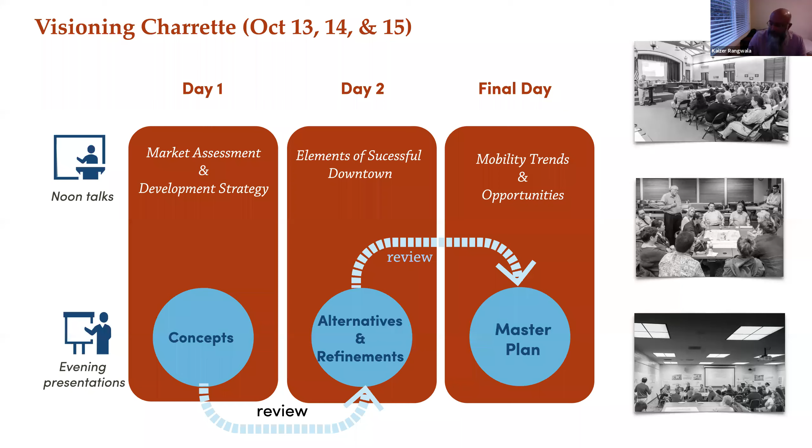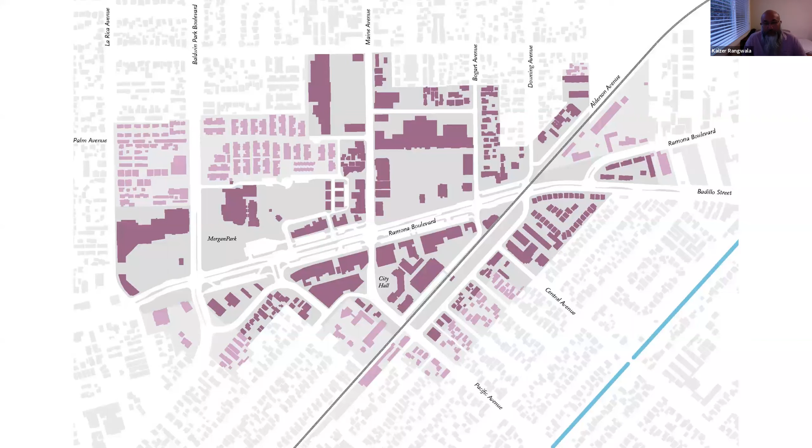So what you see in the darker purple are the buildings and lots that are within the existing specific plan. And what you see in the lighter purple are expanded areas of the specific plan. This is the question that we received yesterday: why do we expand certain areas? I want to hone in on this graphic and show precisely why we're expanding. We want to take opportunities that present themselves at the station and also protect the existing neighborhood. Involving some of the frontage parcels along the station helps us do that. In addition, there are additional opportunities that have presented themselves as catalytic sites since the last specific plan. They've been added to expand the boundaries. So the new boundaries are everything that is dark purple and the light purple areas.

This is a 3D rendering that illustrates a couple of important concepts, and I want to quickly highlight 2 or 3. The downtown Baldwin Park is over 142 years old, the entire city of Baldwin Park. And the downtown really kicked off when you had the red line coming in along Ramona, and you had a grid system that provided access.

Over the years, that existing street grid system has been eroded by consolidation of certain blocks. And you can see that as you look at the grid system around downtown Baldwin Park, when it comes into the downtown area, you see larger chunks of land. In most downtowns, you see the opposite. When you come to the downtown, you see a much more granular, much finer network of streets.

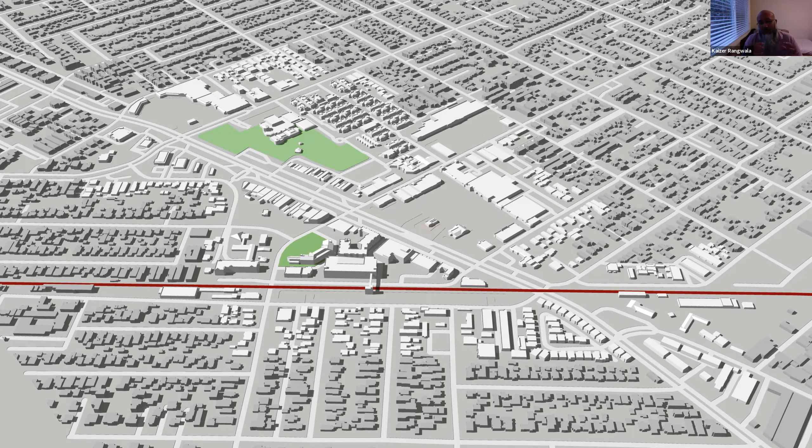The challenges as we look at making this area more friendly, more walkable, because one of the things we heard from the interviews we conducted is it's difficult to get from one destination to another. And by the way, you have some really good assets and really good destinations in the downtown. The question is, how do you link, how do you make the journey between these destinations also as wonderful as

the destinations itself? We started exploring how do you weave a network of streets, weave together the streets that are there and create a finer granular street network. But then also, besides the linkages and reweaving the streets, the opportunity that the streets present to reimagine them, not just as places to move traffic, but as multimodal, perhaps even linear open spaces that can stitch together your existing open spaces and a variety of new open spaces. So a variety of street types that begin to stitch together your variety of existing and proposed open spaces.

Now, another thing this super block does is you see the buildings and you see large areas of gray. Those gray areas are essentially parking lots. And in the downtown area, you have 776 parking spaces, plus about 511 in the parking garage at the station. Average occupancy of parking in the downtown is about 56%, and that is roughly to say that half of the parking spaces are not occupied. And there is a surplus of 325 spaces. That's a great opportunity to attract investment and to leverage enhancing the public realm, both in terms of streets and

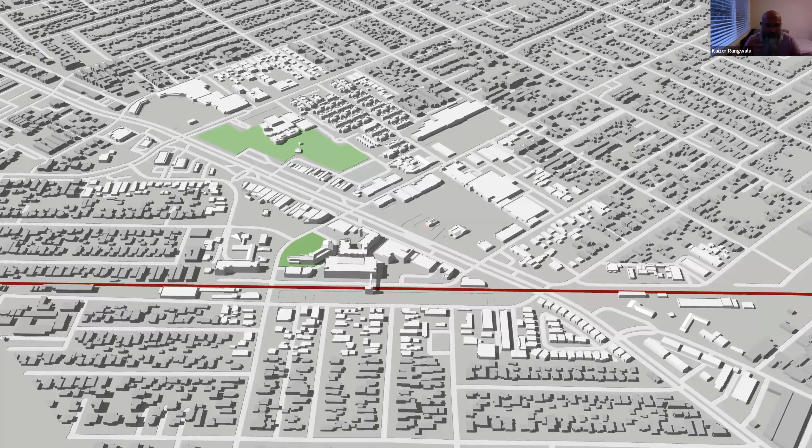open spaces. So with that introduction, I want to introduce Tim Erney from Kittelson, who's going to walk you through some of the mobility concepts and parking strategy concepts that we have been discussing, and then he will introduce the next speaker following his talk.

Great, thank you, Kaizer. Just wanted to do a quick sound check to make sure everything sounds okay. We good? Yep. We are good, excellent.

So as Kaizer mentioned, Baldwin Park in particular has some really unique transportation options and some great opportunities that we can take advantage of. As an example, it's relatively flat, and outside the downtown area, it has a pretty good grid system. And most importantly, there's a lot of transit options. And we really need to take advantage of this, especially with respect to the transit infrastructure and the commitments that have been made by multiple agencies, including the city.

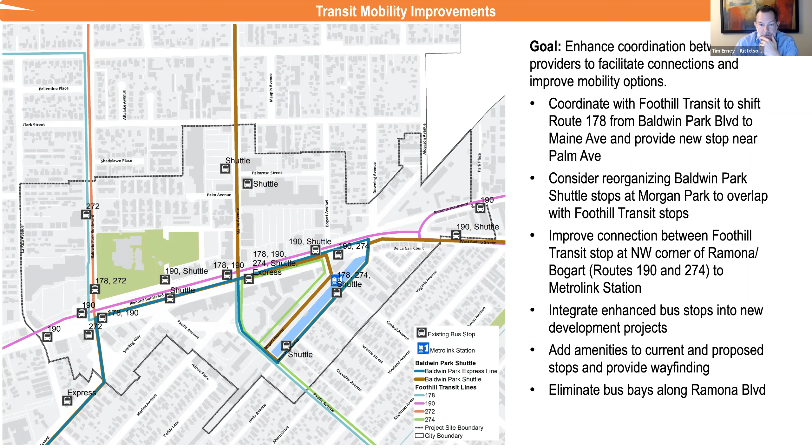So another thing and another opportunity to improve access is mobility hubs. And this is a relatively new term for kind of an older school way of doing things. But really, mobility hubs look to improve the connection between the modes of travel and to really facilitate the connection between user groups. So when we talk about mobility hubs, what we're looking at is a combination of various elements, such as wayfinding, bike share or scooter stations, kiosks and information for transit lines, pickup and drop off areas, spaces for electric vehicle charging, Wi-Fi hotspots, even locations to put mobile retail or food trucks.

So really, these are hubs that people can use when they're traveling between modes, and really it kind of actually becomes a little active community area. So there's 3 locations right now that would be great to put in mobility hubs. And this is at the Metrolink station, near City Hall, and for Morgan Park and the community center.

In addition, as we continue to look at expansion of the land use program throughout the area, there's other opportunities that could arise too, such as at the Valu Plus Marketplace and the Maine Avenue Marketplace. So as these areas develop, there could be opportunities to put mobility hubs there as well to kind of continue to build that network across the city.

So one thing though that we often forget is that streets aren't just for cars, right? Streets are for people. And we need to make sure that we're planning for and building roadways that are safe and convenient for everybody. And that's for young and old, for people riding a bike or on foot, for people who are strong bike commuters and people who are out there riding for the first time, people who are in cars, people who are doing deliveries, and people who are getting on a bus.

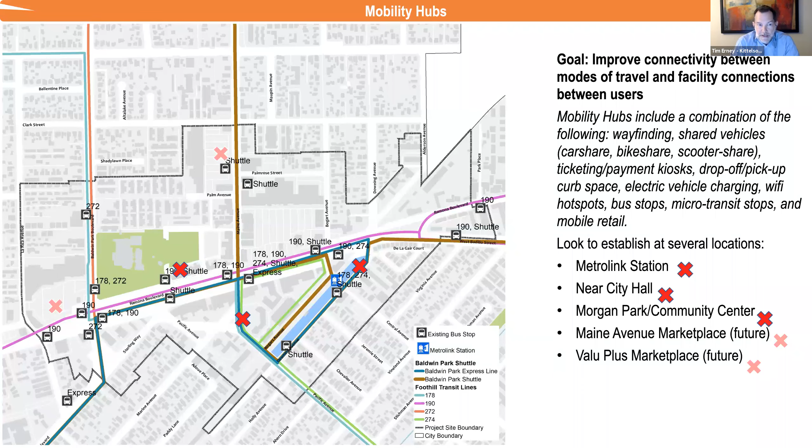So when we talk about parking and parking management, what we're saying is that we want to account for vehicles, but we want to make sure that we're doing it smartly. So we want to account for the vehicles, we want to account for their demand, and we want to look at ways to minimize excessive parking. As Kaizer mentioned earlier, there's a lot of parking that's currently available throughout the downtown area, and that parking takes up a lot of room. And this is especially important because for a lot of these spaces, cars are just parked there all day long. They're not moving. So that space can't be used for anything else throughout the day.

So looking throughout the downtown, we provided this information earlier. There are several lots that are historically less than 50% occupied on a normal day. And there's a lot of other things we can do with that space. We can put in new buildings, we can put in parks, we can put in transit hubs like we talked about, and a lot of other things.

But honestly, parking is always a big topic in these conversations. Half the people think we're not providing enough, and half the people think we're providing too much parking. So it's really difficult to strike that middle ground. But one way of doing that is to really look at parking management strategies, especially associated with the transit-oriented development that we're talking about. So some of the things that we're looking at is

developing a goal to increase the efficiency of the parking facilities, to improve the utilization, and to minimize the total amount of parking area. And in order to do that, we're going to look at things such as providing convenient on-street parking adjacent to new commercial uses, so new commercial buildings have parking directly in front. Providing security and access control if we're looking at maybe having people be allowed to park overnight. Let's say their residential building doesn't have enough parking and they want to be able to park on street or in a lot, make sure that's safe and secure.

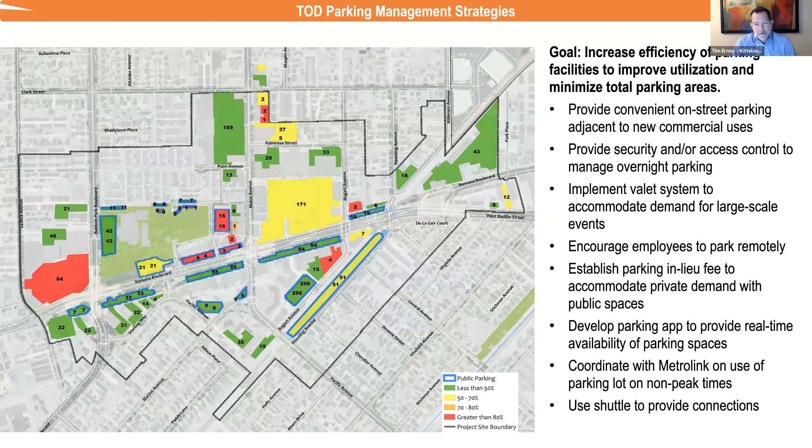And when we talk about private parking, primarily this is parking that's being developed as part of new buildings that are coming in. And we want to make sure that the new projects that are coming in are right sizing their parking, because honestly, parking is very expensive to build, especially if you're building it underground. And we don't want to have developers burdened with a high amount of parking that may not be used and can really add to the cost of their product.

So there could be opportunities to allow developments to meet their parking requirements at off-site locations, to allow for sharing of spaces. So typically parking codes say that if you're a residential, you have to provide X number of spaces for your units and then Y number of spaces for any commercial space. But sometimes those can be combined because the parking demand for residential tends to be overnight versus during the day for commercial. So maybe we can change the codes a little bit.

We can look at parking easements or use agreements between the city and private developers, once again, to maximize that parking efficiency, or establishing in lieu fees so that the developers could kind of purchase excess spaces from the city and use that to accommodate their requirements.

We also want to look at unbundling parking supply. And that means if you're moving into a new building, your parking space isn't guaranteed, but you have to purchase it just like you would purchase your unit. And therefore, if people don't want to have a car, they don't have to pay extra for a parking space they're not going to use.

We also want to make sure that people are accounting for pickup and drop off and deliveries either on the curb or inside the parking garage. So that will help improve the ability for car share or Ubers and Lyfts to access the properties. And we also want to have electric vehicle parking included as part of these developments. So these are all kind of private parking strategies we're going to be exploring as part of this program to see how, once again, we can maximize the efficiency of parking and minimize wasteful parking.

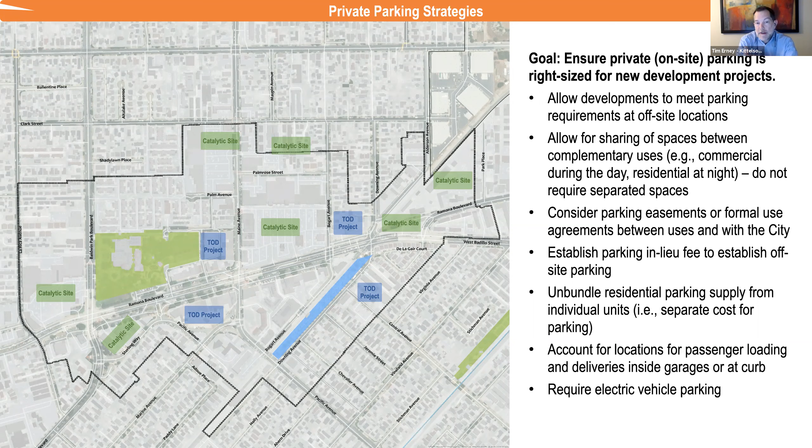So with that, I will turn it over to Vinayak to talk a little bit more about the public realm and the street network.

Can you all hear me? Mm-hmm. And can you see my mouse moving on the screen? We can't see the mouse. Can't see that. Okay, don't worry about it. Just wanted to know.

Okay, so just to pick up from Tim's points, one of the most important assets that you have, just to repeat a little bit on what I was saying yesterday, are your streets. And as Tim said very explicitly, the streets are not for cars, they're really for people, they are extended parks. And I keep saying this again and again, it's the most beautiful thing I've heard about streets, it changes your perception of what streets can be.

So what this diagram basically shows you is before we get into all the big and small moves that we shared with you yesterday and we're going to share with you today, the bigger strategy is to figure out how to create an integrated network of streets. And one of the major observations we made in studying your downtown is there is a tendency to combine blocks and make sort of mega blocks.

This is a tendency we've seen in many cities. Over time, walkable sized blocks get coalesced into much larger swaths that are 1,000 feet long. And this is a recipe for two debacles. One is traffic congestion, because if you have an accident on one side of a mega block, traffic circulation becomes very difficult around. And as a pedestrian, you don't get easy access from one side to the other.

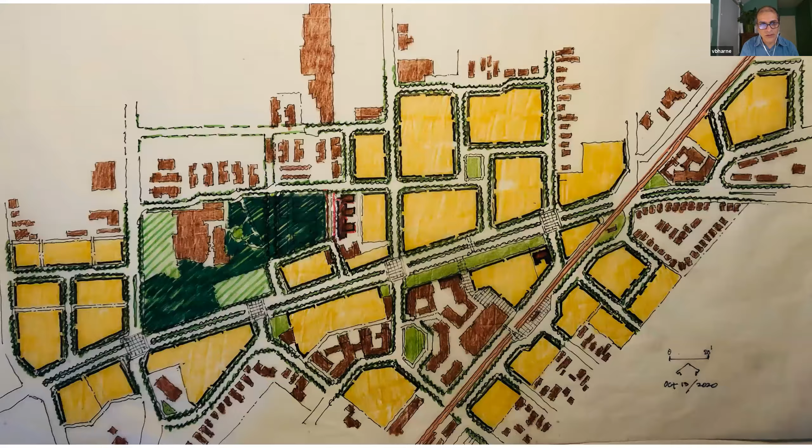That's okay. That's all right, guys. Just, it's okay. Just keep going. You have to go to, there you go.

So if you look at the block west of Pacific Avenue, in either corner of the block facing Ramona, there are two open spaces. These open spaces are actually part of the city-owned parking lot right now. What we are simply doing is note that the two buildings in the corners are lighter color, because we feel they are buildings of some significant merit. There's a building to the west that is made of brick. It's a very beautiful brick building, which you will not be able to build today very easily. It's a quality building. And there's another one to the right-hand side, to the east.

And we feel keeping those buildings also makes a kind of a unique piece, because you don't have to demolish everything you have in your downtown. You don't have to dissolve everything over time. Some of these buildings could become important markers that talk about history, talk about how this place evolved, etc. So we're acknowledging this by making very small open spaces between them, which could also act as moments of repose, programmed either privately or publicly, and we can study them as this plan evolves.

So in terms of pure public improvement strategies, you have the train station plaza, the plaza in front of City Hall, the paseo next to the parking garage, the long linear plaza south of Ramona, the intersections along Ramona, the enhancement of Ramona itself, the entire street network that you can see in green here, and the tiny little dots of open spaces scattered here and there.

The last open space that is worthy of mention, which you can see as a small rectangle in the 4-block development between Bogart and Maine, north of Ramona, is a little neighborhood park that could either be a private park or a public park. The point we are trying to make there is, with so much potential for development in that piece of land, instead of all space being private, we feel it necessary to have a small public space that can be used as part of a little neighborhood play area.

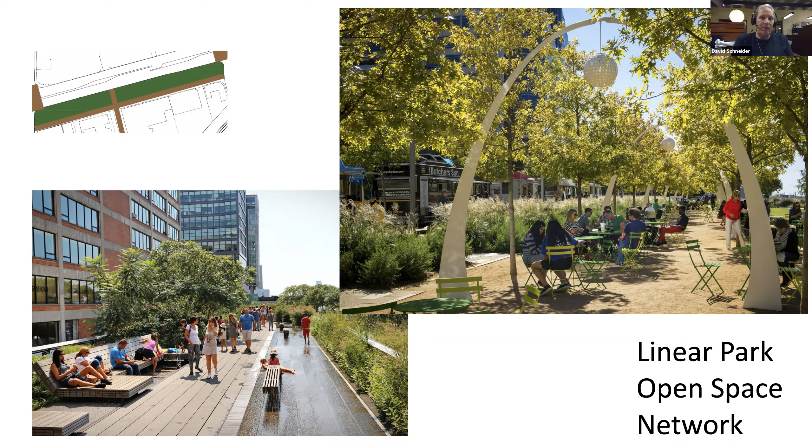And as you can see in the background, there are lots of opportunities for pop-up mom and pop trucks and lunch trucks and various other elements to come in and fill the areas, especially before development starts to happen. Some of the areas may already have some restaurants, some areas may not, like I'm thinking of in front of the Verizon building. You might want to be able to take advantage of some of those spaces along there. And then the other photograph starts to look at a more urban area where it's a little bit more linear, a little bit different in appearance. Can you go to the next slide?

Other opportunities for this area is we could have nighttime lighting that could really attract people from Ramona. Again, we're trying to get people off of Ramona. If that's a major collector street for people passing through, we'd like to be able to get them to see the area and see the happenings and what's going on. Again, the linear park could have built environments such as trellises, or it could use temporary features such as umbrellas and others. And if we go to the next slide.

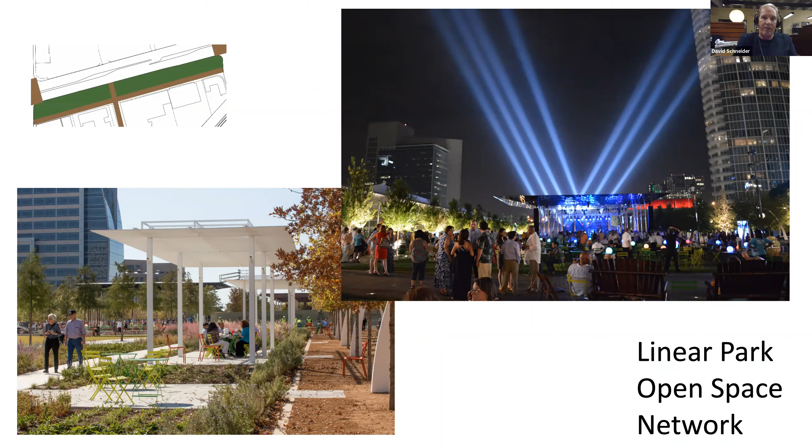And maybe at the corners of Maine and Ramona, we might introduce simple little waterworks elements that basically announce the gateway. These also become elements along the sequence of the walkways that get people to move through the area. So these might be strategically located along the paths from the train station to this area, or even as we move farther north. Next slide.

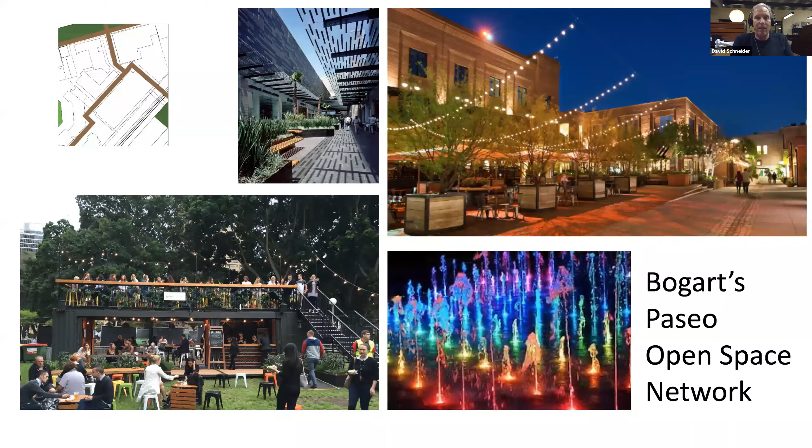And as we move through the Paseo, what does that start to look like? We might have interesting lighting, as well as using shade trellises to create shadow patterns, and also be able to have pop-up buildings, some things that are just simple use of containers to build up within the parking lots in a short period of time. But this is basically to try to get those people that are on the commuter trains to see a festive space, be able to start to come across and move through the Paseo and find their way to Ramona and through the other wonderful neighborhood areas. Next slide.

And how else can we start to do this? We have some big canvases, such as the ARC building and also the parking garage. We can use murals or light shows that can be done on maybe the ARC building or even the parking garage itself to, again, captivate people that are coming through on the commuter train systems and people coming up Pacific and other streets to be able to start to see that.

And also on the Paseo, we would like to have open spaces for people to be able to have outdoor events going on that could be readily seen from either Ramona or from the train station to, again, get people invited in through the neighborhoods. Next slide.

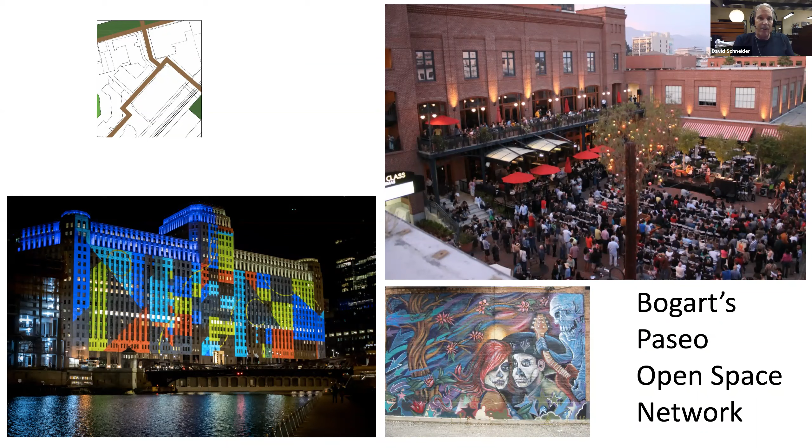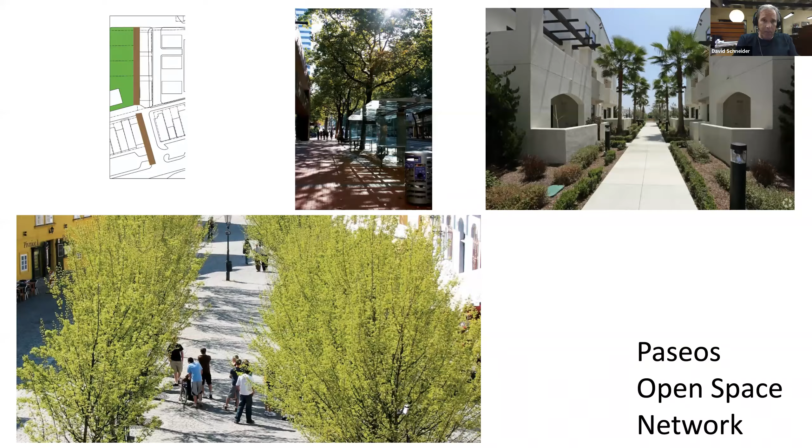So then we also have other paseos that we have to look at. These are different. These are paseos that might happen along the north side of Ramona over by Morgan Park. And how do we start to introduce that park-like feeling, again, bringing people down to Ramona from this space, or if you're on the other side of Ramona on the southern side, entice them to walk up and go up into Morgan Park. So these are various different options that we can start to look at, but shade and coverage is important to us.

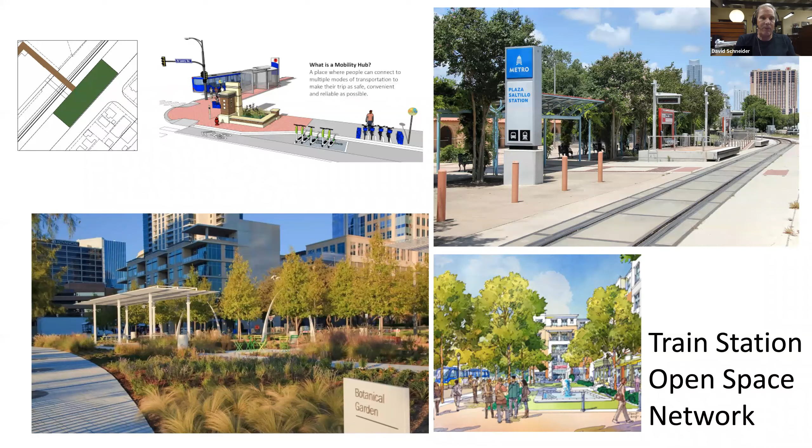And then we move to our small parks. We have our neighborhood parks to the north, and then we have our civic center park on the south side. And what would those elements start to be? On the small parks to the north, we might have play areas and naturalized landscapes for people to be able to use and go through.

And in front of the Civic Center Park, obviously, we'd want to have things that would allow people to rest along their walks, but also get them to come through. There might be a speaker's corner or something of that nature in front of the City Hall that might be pertinent to those functions. Next slide.

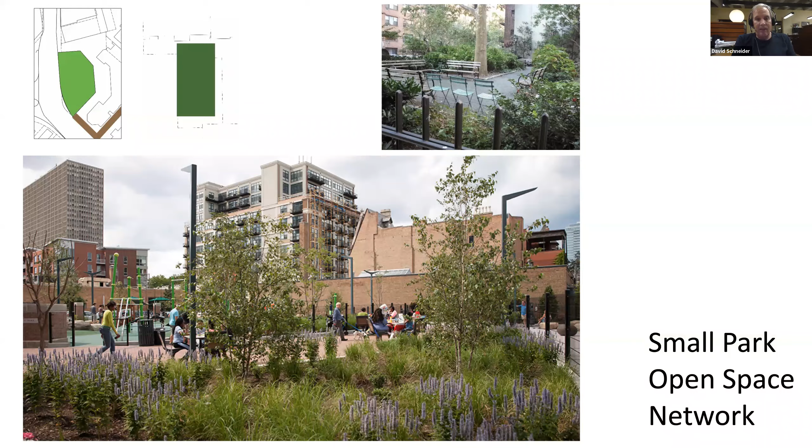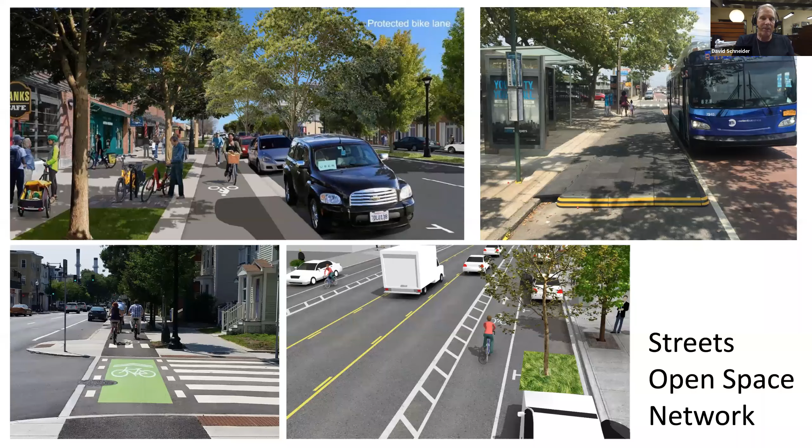And you also have the nice parked cars that give you a protection from the street, from the faster moving vehicles. And also we've introduced trees between the parking places that actually start to narrow the street, but also offer shade to all those who are using the bicycle and pedestrian paths. Next slide.

Or we could have quiet seating areas that might happen closer to where the new Starbucks is going, and those type of elements. So we have a variety of spaces, and they're very much opportunities to be used. Next slide.

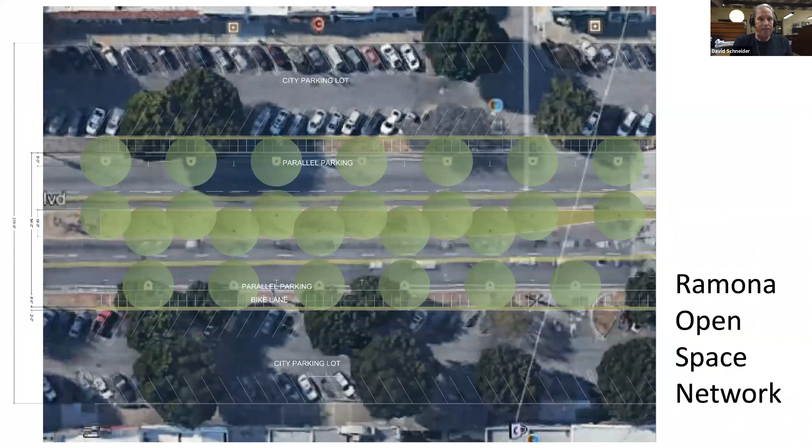So we started to look at Ramona and what would Ramona start to be based on a street tree pattern. And basically this shows that we could actually put in our bicycle path along the particular edge of Ramona. As Vinayak has mentioned, we're not changing any of the curb lines along that edge.

So what we have done is added 8 foot of parking along the outer edges of Ramona, and just within that curb line to the curb line roughly of the existing parking lots would become an elevated bicycle path, 6 inches higher than the street, along that particular edge. And that's how the bicycles would start to move along this side. And if we can go to the next slide.

This is kind of a section of what that condition might be. So we would have the 2 travel lanes and all the way across the 39 feet or 34 feet that's the existing width from the median to the edge. And then we would add another 8 foot for a bike trail along that edge. And then the parking lots would exist. And then we go to the next slide.

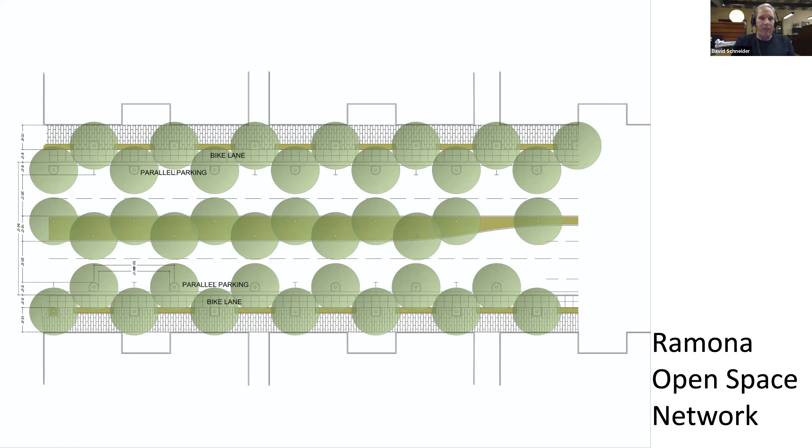this is a section of what that would start to look like. That 12 feet of space plus the 3'6" could become part of an easement from those property owners to create the pedestrian space and the space along the edges for retail or mixed use events. And even on the north side of the street, if you chose to do so, arcades could be employed and allow the second floors to be able to come out and come over that space. So there are opportunities for that to happen.

I don't think you'd want to do that on the south side because then it would be on the north side of the building in too much shade. But I think along the northern edge where you get the southern sun in the winter times, that would work out just fine for an arcade system if you chose to do that. Allow the developers to move across the easement in the second and third stories above. Next slide.

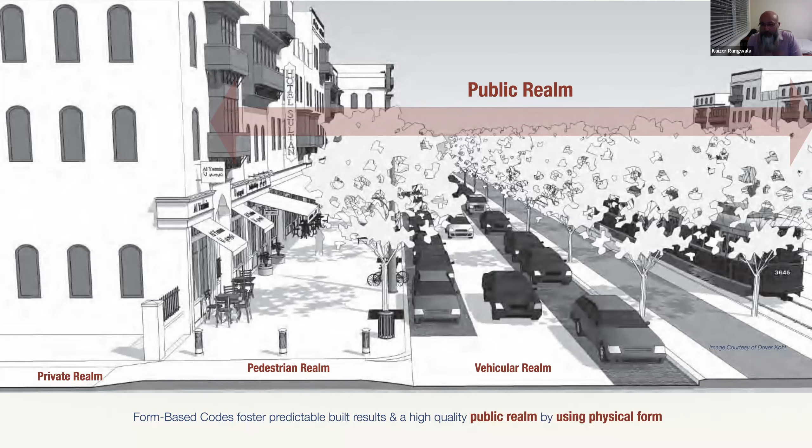It's less important what's inside the building, whether it's residential, office, commercial. The frontages will vary. But the land uses are less important. The regulating mechanism here is the public realm, not so much land uses.

They could be courtyard buildings, they could be mixed-use buildings, work-live units. But if you are on a different street, say a boulevard that is mixed boulevard, then those building types might be completely different. And then if you're on a residential street, I mean, remember the Mission Meridian project that Vinayak talked about. This is a great example.

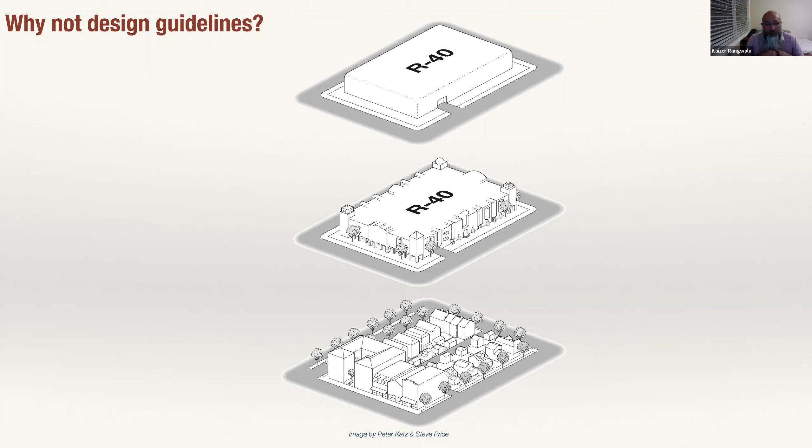So you break the box. You break the box with building types, and those building types are based on the context of the street, the context of the open space, the context of what exists within the area. So that's what we are interested in doing with this code.

We're also interested in looking at open spaces and a continuum of open spaces, both that start in the public realm, but go into the private realm as well. So we talked about continuous greenway or a linear park. A community park already exists in the downtown area. We're talking about creating new plazas, new squares, neighborhood parks, opportunities for community gardens and pocket parks, and then extending beyond the neighborhood and the block, and then continuing the open spaces.

Particularly relevant in this pandemic and the post-pandemic world is how do you provide open spaces on the lot and within the building, whether it's in a patio or a roof garden, or providing a courtyard, terrace, or a yard. These are private open spaces, but providing that continuum is important, and we're going to code that.

Streets are incredibly important. We've started discussing them. We're going to discuss street sections tomorrow in further detail, but we're talking not just about volume of traffic and speed, but we're also talking the ability of street to create places, to be multimodal, to be context sensitive, and to support adjacent land uses, and more importantly, based on a community vision.

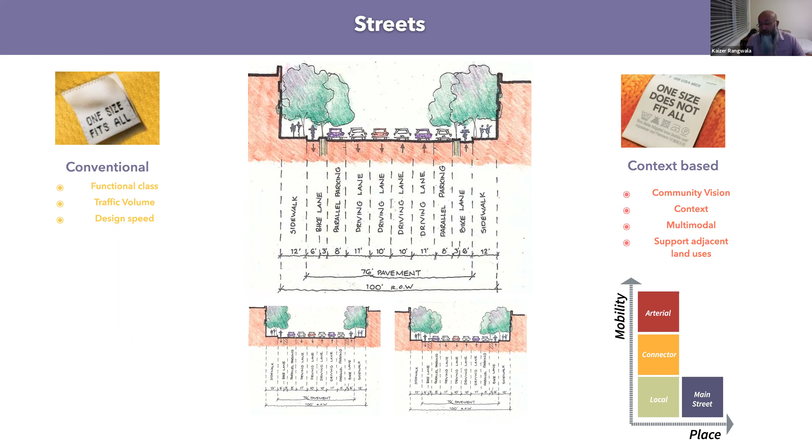And different streets have different purposes. They could be either placemaking, or they could be geared towards mobility. There's certain streets that the primary function may be to move traffic and less important is the place, but there are other streets like the ones that you have in the downtown area where place is incredibly important and should not be forgotten. So the standards will look at that.

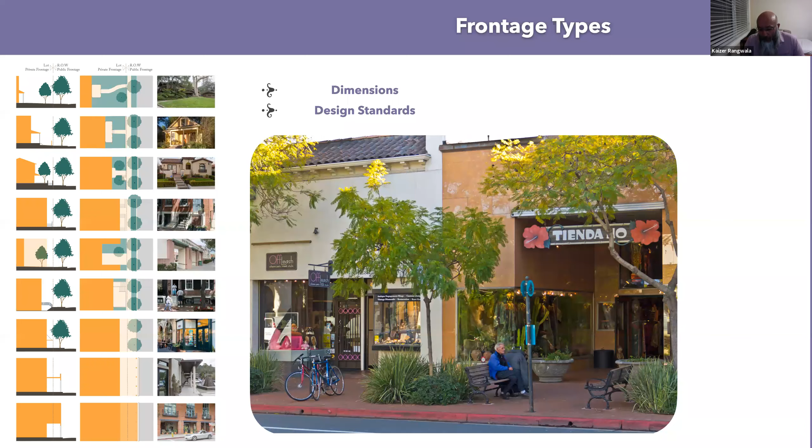And then frontages. Frontages are how the building comes and meets the street so that you avoid having dead facades or frontages that are inappropriate for the land uses that are provided within the building.

So again, we will come back and we'll have a much more robust discussion on the code. We'll have a regulating plan. We'll talk about the zones and the different urban standards. But that's the concept I wanted to present today, and we will at this point take a pause and begin answering any questions that you may have.

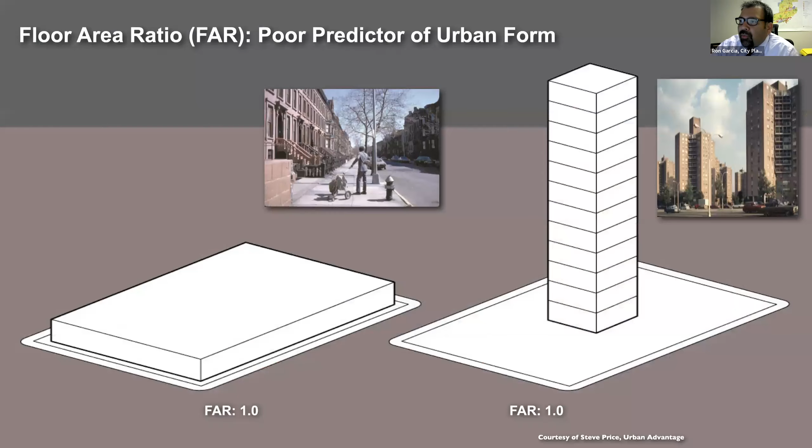Thank you, Kaizer. Looks like we have one comment that came in with respect to Ramona. Just for clarification, is the plan recommending that Ramona continue to be 2 lanes on each side?

Yeah, I can take a stab at answering that one first. So our recommendation at this point is to maintain 2 lanes in each direction. Partially, this is due to consistency on Ramona to both the east and the west of the area. And 2, we feel that with the additional development that could occur in the area, we would probably need to maintain that level of mobility for vehicles.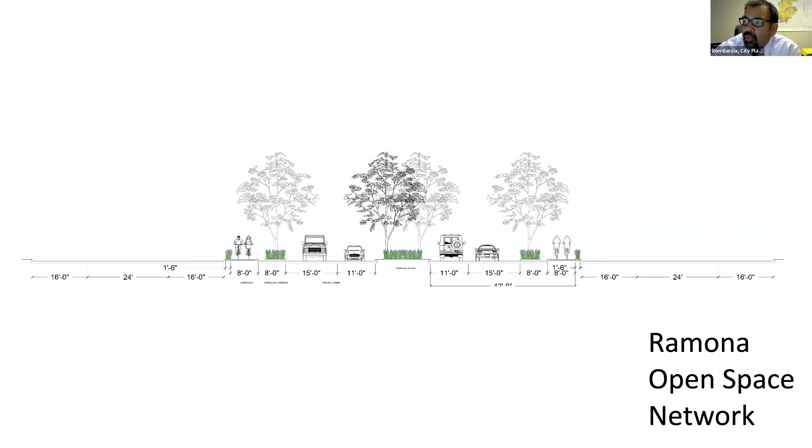Thank you, Tim. We got another question coming in. It says, is there an optimal street width to integrate landscape features in the medians or landscape buffer between bike lanes and vehicles? For example, Main Avenue going to Pacific Avenue is now a one-way lane street. Are these streets eligible to have both a pedestrian and vehicular realm? This area specifically is where the city attracts more foot traffic through community events.

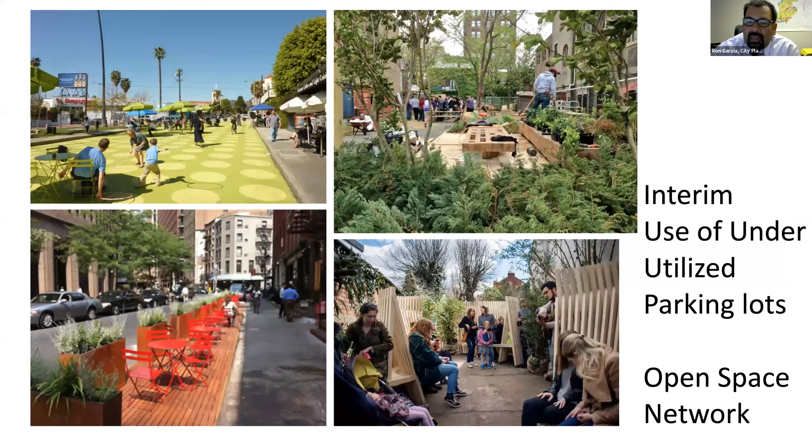Tim, you want to take a crack at that? Sure, I can start, but looking for other input as well. So yeah, there's a couple different factors at play when we're looking at the width of streets. So one is, for as much as we can, we don't want to expand past the current curb to curb width, because then it becomes very expensive to have to redo sidewalks, et cetera.

With the exception of locations where there's new buildings proposed for the entire block, in which case you can actually set the entire street back and reimagine things like we talked about a little bit earlier. So, if you're maintaining things within the current curb to curb width, so let's say on Pacific or Main, then it's like, well, what can you do within that space that's most effective and most efficient for moving people, including bikes and cars?

So there are recommended lane widths for bike lanes. If you have just a single striped bike lane that's on a lower volume street, you could do a 4-foot lane. Oftentimes, though, that includes the gutter, which isn't the most pleasant place to ride. So we like to recommend at least 5 feet for just a regular striped bike lane. If you're going into something wider, let's say a buffered bike lane, usually it's a 5-foot lane plus a 2 or 3 foot buffer next to it.

And then that can also depend if you're next to parking, because you want to make sure there's a buffer or a wide enough lane that bicyclists are not affected by car doors opening and closing. So there's a lot of different factors that go into it, but we'd recommend a minimum of 5 feet for just a regular lane, maybe 8 feet for a buffered lane. And then if you wanted to go something more intense for bicyclists, so protected lanes, sometimes they're 8 to 12 feet wide.

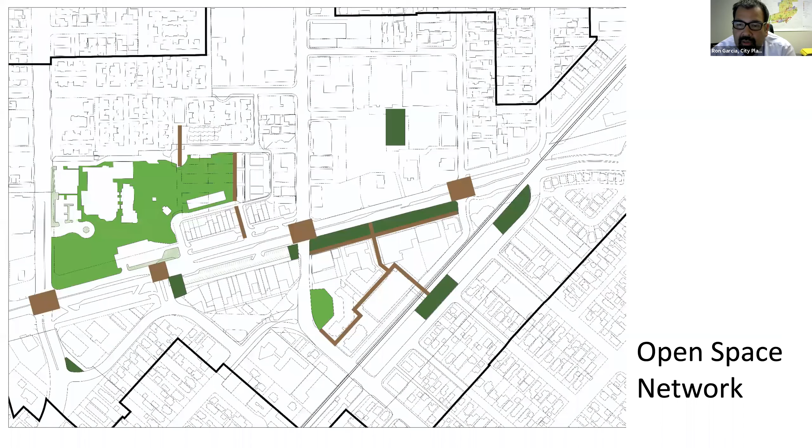Another site too that is potential is the corner on the east side of Main, which is directly adjacent to essentially where the Urban X is located. If you're familiar with that area, that is a phase 2. So in the future, there's potential for development in that area as well. I got it. Thank you.

Looks like we haven't got any more comments. Again, feel free to raise your hand, and we'll go ahead and unmute you. Looks like we got another comment. Says, will the specific plan address any street improvements at intersections? For example, Old Town Pasadena has crosswalks that allow pedestrians to walk directly across the middle of the road. The city can integrate some public art at some intersection. This is a good point there.

So let me start answering the first part of this. What the commenter is referring to is what we'll say is a pedestrian scramble. It's allowing pedestrians to cross all directions of the intersection, typically at one time. And these are great at locations where you have a lot of people trying to cross diagonally. So instead of having to, let's say, go north-south and then east-west, they're able just to make the movement at one time.

So what we would want to do, I believe, and Kaiser, correct me if I'm wrong, is not to say that they have to be in place in these locations, because it would require some additional traffic engineering and looking at pedestrian volumes and signal timing and make sure you're not affecting bus flow and those type of things. But I think we would want to encourage the implementation of them as possible, and also incorporate some of the decorative treatments as part of the intersection designs as well, as you see in Vinayak's plan here. Include those special visuals, the painted sidewalks, the different colors, to make it more obvious as a place where people are moving.